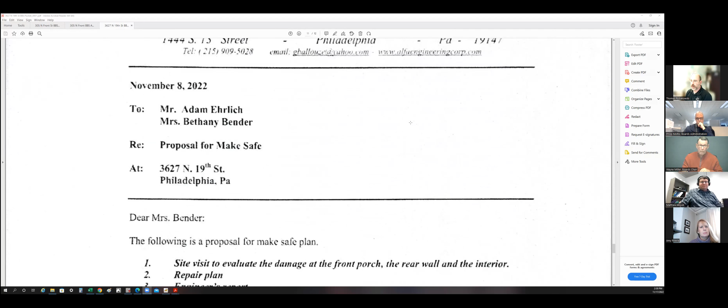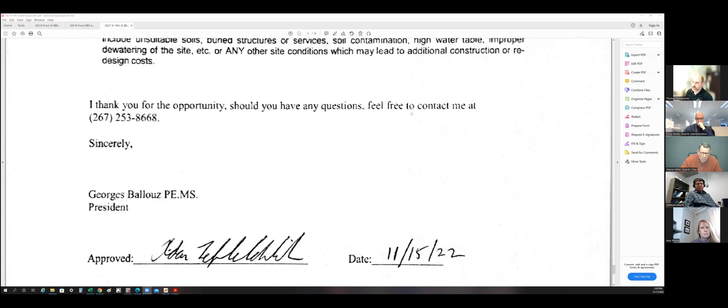Thanks, Tom. There you go. Okay, so this is the document we received via email yesterday. The document is a quote or invoice for engineering services dated November 8th of 2022. It has one of the appellant's names on it as well, and at the bottom of page 2 has a signature dated November 15th. With that said, obviously the violations exist, and there's an engineer's report from a design professional who's been retained. My recommendation to the board is to have a make-safe permit in with the department within 30 days.

Okay, stop sharing the screen. All right, the appellant, are you good with that?

So I do have at least one question. I haven't spoken with the plans examiner for this case, and just wanted to know, before we actually get the plans back from the engineer, what is specifically expected by the plans examiner to see on the plans. I have gotten make-safe permits in the past, and it's sometimes been a bit of a toss-up on what the plans examiner wants to see versus what we can see on the violation versus what the engineer sees. So if we could get a little more clarity on that, it would be appreciated.

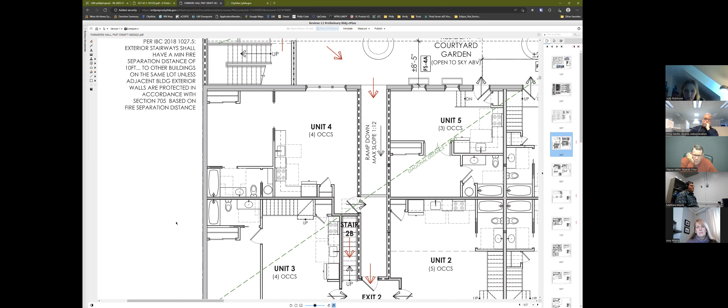Yeah, thank you. Can we see the whole plan? Or just that plan, because we're talking about stairwells and I can't read it. Right, just that. But also once again, stair one doesn't look like this now, it's different. Then we need to look at the right one. Do you want me to bring up my plans and figure it out? Yeah, if it makes it easier. I think this is the one that's the most recent.

Yes, that's the one that's the most recent. Matt, a question. When you said that stair one is okay, you may be referring to a specific issue, but is stair one, or that passageway around it, still being re-entered from the exterior, from the garden courtyard?

So that is still essentially a problem, that anyone coming off of stair 2A who wants to get to Girard Ave would have to go back under the building through stair 1, through exit 1 which contains stair 1, and then to the exterior. Right, so it's really the same or a similar issue with both that and the way that goes out to 6th Street. Yes, because if all those units needed to get to Girard Ave, if for some reason they couldn't get to stair 2A, they would have to re-enter the building as well.

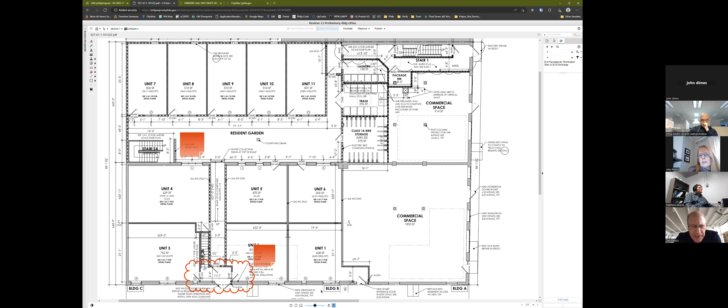Yeah, I can see why. Doesn't the laundry room then technically end up with its door in an exit passageway as well? Well, they call it out as a 90-minute door, so that's sort of accounted for. But if you call it that, then yeah, especially since there's a room right here.

Yeah, and I was doing that in part. It also has the walls around it, not totally 2 hours all the way around, but there's a little bit here that's 1 hour, and it has 90-minute doors.

The reason the door is positioned where it is presently is because I'm trying to get above our stair configuration, which is different. It might help to go to that second floor plan so you can see that, so I'm trying to make it completely 2-hour enclosed.

Let's go back to this plan again. Go to the 2-hour... where is it? Where is it?

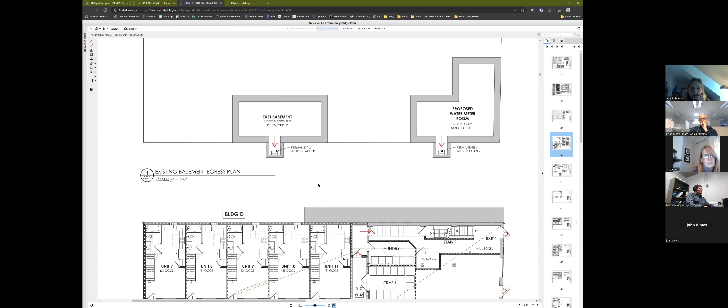There, see, I want to make sure that whole stair is enclosed with 2 hours, so I moved the door on the first floor in order to make that complete 2-hour enclosure, if that makes sense. I could always push it back, but then I don't have a place to complete my 2-hour enclosure.

And again, I'm treating that more like it's a lobby. And if the package room, if that's giving us a huge problem, we'll just get rid of the darn package room.

The moment to make it completely 2 hours, that's fine too. It's mostly 2 hours at the moment.

I would just, to back up big picture, maybe go back to the first floor again, Matt, if you could. You've got stair 2A, which is coming down. I think we're okay with that as a stair, as long as it's non-combustible, its proximity to the property line, and to the kind of different—I'm assuming all of this is like one property consolidated. Yeah, it is, correct, one building.

But when you come down from there or from other places in the building, there needs to be a really clear, as much as possible, direct way to get out of there from the resident garden, whether it's people on the ground floor who are just coming out and getting out to 6th or Girard, or conversely, coming down from upper floors, primarily on stair 2A.

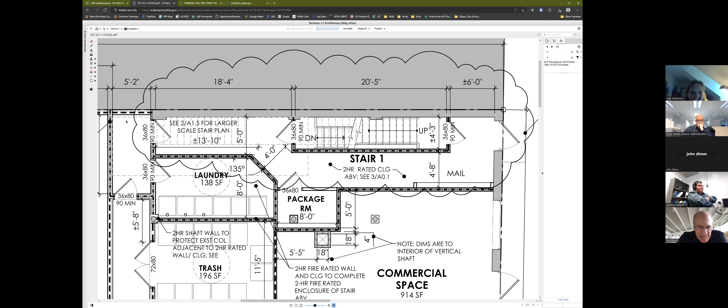Anybody have any ideas? I mean, I can tell you what would make stair 1 code compliant just in of itself. It would be like, ironically, unenclosing stair 1, keeping the lobby rated as is, removing the package room, and then it would just be an interior exit stairway that also lets you exit from the first floor directly to the exterior. What do you think of that?

Because it would just be then one again big enclosure. Okay. Yeah. So, can you mark up on this? Well, at the present time, I don't think I have a review open. So let me just.

So this is kind of the problem right here, because if we're going to call this an exit passageway, then this would have to go. Take it out. To make that go, or move it somewhere else somehow. It was an amenity that we thought, in today's world, would be useful, but we get it. It's not certainly critical to have. Yeah, we'll get rid of it. Because once you remove that, then this could be an exit passageway.

And let me just check exactly what the code says about whether or not you can have interior exit stairways terminating into an exit passageway.

How about the mailboxes though too, Matt? Now, we do need a place for the mailboxes. Oh yeah, the mailboxes have got to go too. The reason I didn't put them on the refusal is because I considered this like a lobby and not like an exit passageway or an exit. It was just like another area which you egress through. I think is what the exit discharge section calls it.

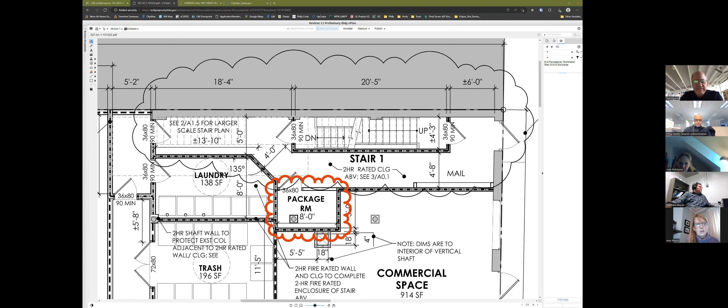No, I'm more concerned about people coming out of the courtyard, trying to get out and passing a laundry room in an exit passageway, passing through another door, passing a package room. Which, in that case, leads to this being treated as an exit passageway, meaning it couldn't have this package room or the mail.

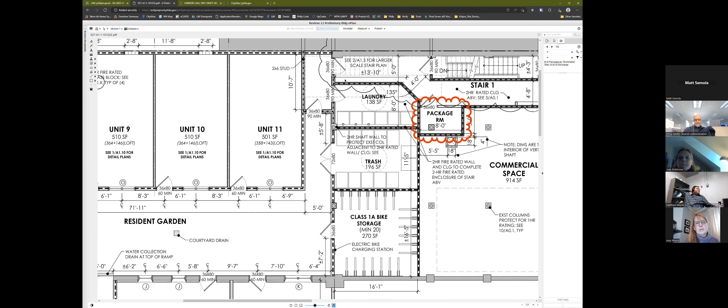What about the laundry? I mean, well, that's outside of that space. Yeah, but it's still part of the way you're getting out of that courtyard in an enclosed area. Yeah, that's the thing.

On that note, if I moved the door, if I flipped the laundry room around and got that door that's going into the laundry room -- the washers and dryers are shown now -- and then pushed the enclosure where we have the first 90-minute door, if I push that up to where the dash line is, I want to keep my 2-hour enclosure of that stair that's happening above us.

If I got that laundry room door out of that area, would that make you happy? Because I think I can do that. I won't get as many washers and dryers, but I think that's the sacrifice we make.

I guess I didn't understand where you're putting the door, but if I'm trying to get out of that courtyard and I'm running down that corridor, am I still passing the laundry? You're passing the door, yes, but that would be like if you were in a corridor in a building -- you're passing doors to other rooms along the side, just not directly in front of you.

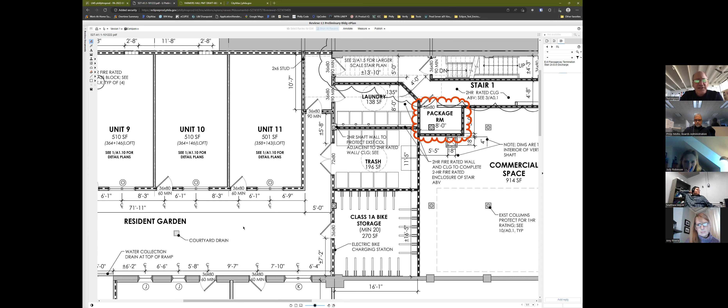But isn't the space between unit 11 and say the trash room -- aren't you going between whatever, a 6-story building and a 4-story building? I mean, I know they're not the number of stories, but right, they're basically... you're in a canyon.

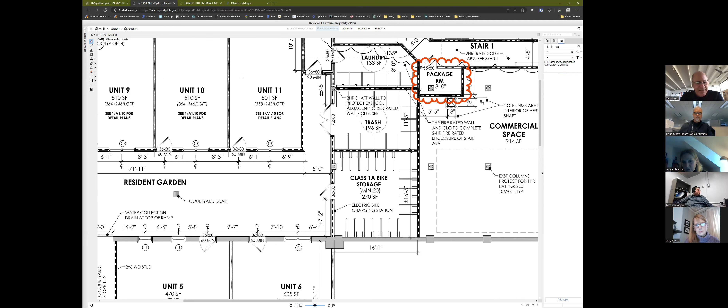You're in a canyon. You're covered above, though. For a little bit. Are you covered above? You're covered above, so it's a canyon that you're covered above because there are walkways above to get you to that stair as well.

Okay, I have to look at the other plans again. I'm going to have to go back to the second floor plans. Okay, here you go. This is what she's referring to.

Right, so that bit where all the dashed lines are heading to stair 1, that's all exterior space, right? That's over here by 14 through 18, this is all exterior. And then you turn up and you're heading to stair 1, that's all exterior as well, right? But again, you've got the floor above you covering you. But yes, essentially, yes.

This is buildings B and C.

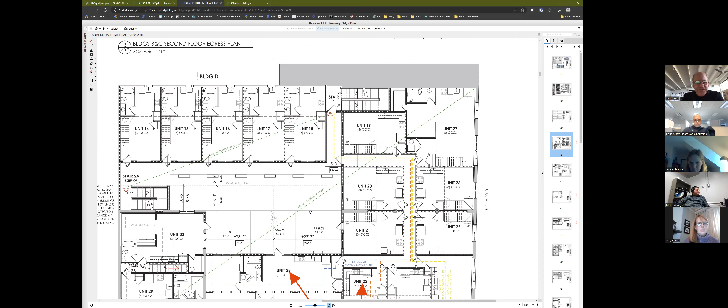Are we looking for... are you going to the 3rd floor or what? Oh, or what are we? No one was saying anything, so I didn't know if you were just thinking. Yeah, no, I mean, it's...

Okay, this is 3rd floor. It's weird because there are height differentials. Oh, okay, all right, I see, because right, like this floor says 2nd floor for buildings A and D, but it's 3rd floor for B and C. So it's getting backwards in terms of reading, it's confusing.

But so the point is that the space is wider there. Everything's coming out. Yeah, so you're right, okay, it is capped on the ground floor. There's a little bit here, but I think there's still a bit that's trying to outline it. This part is still exterior. Right, it's all exterior the whole way up the back and down the side of it. Yeah, okay.

Simply put, this is a preliminary review, and presumably you're doing it in order to get feedback. I guess we're not convinced that there isn't a way you can solve all these problems and still get your package room and address all those functional, programmatic needs that you have. It's just that in trying to accommodate everything, it's become more convoluted than we're hoping it could be.

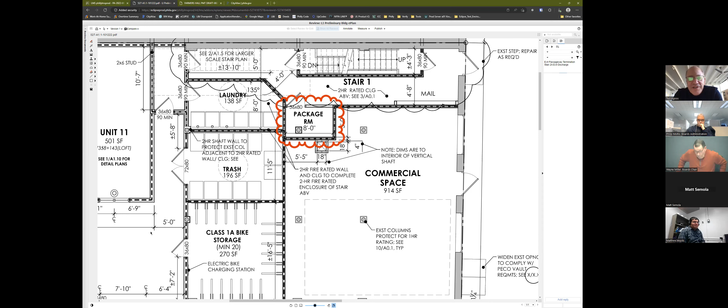So we have some specific feedback on the package room and the mail, okay, we get that. As I understand the code, one of those ways out to the street could be through a lobby, which can have mail and package room off it. If the other one were direct—and again, I don't know how to resolve that—but if stair 2B didn't dump you into the same space so it was a straight shot out, I don't know whether that would help.

Judy, I have a question for you. Yes, and we'll try to wrap this up quickly.

So that's stair 2A. There's a big red box there, I can't read what it is. This is a 2-hour rating wall, specifically right here. Is that a window there? That double window—a door, a window? Unit 4 coming out of unit 4. Yeah, that's a window for that unit.

What I was going to say—if we could extend that exit, you come down 2A and go right to that and close all that. But then you're chopping into the open space, and you eliminate that. From what I'm understanding, 2A isn't so much an issue as stair 1, because all those back units feed right—they go down the hallway and walkway right to that exit, 2A, that is.

Now I want to see stair 1 lobby exit, the Girard Avenue exit. So that'd be units 14 through 16, 18, correct, these right here. They all feed right into that, as well as stair 2A—they could take either one from there.

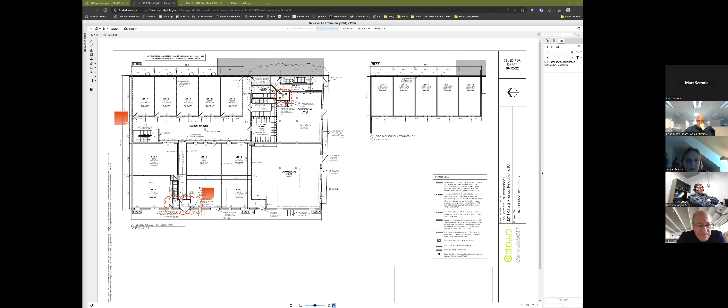What else have we got? The other is the common path of egress travel. If you go back to that map, right here—yeah, my new drawings have the actual length. From those 3 units, our common path of egress travel ranges from 128 feet to 145. So we're beyond the 125 feet to that exit door where we have 2 choices. But we are just on the 2nd floor.

Yeah, wait. John, how do you feel about this? I think that's slightly longer, but still. I mean, they'd be allowed to have it 125 feet if this was all residential with an NFPA 13R system.

Hold on. So is there, what's the allowance? So it's not all residential. So the code dictates the distance. It's because of the commercial on the ground floor, but yeah.

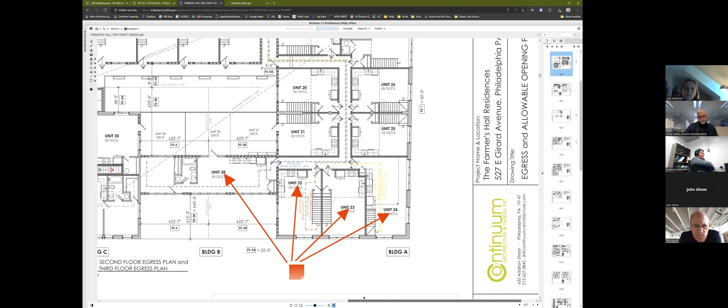Okay, because I think it says, because they go here and then - it's just confusing because of all the different heights in the existing building. Yep, and so they end here. This is okay, so there are just bi-level units. It ends at 3rd floor. Okay, I was mixing them up with the other ones.

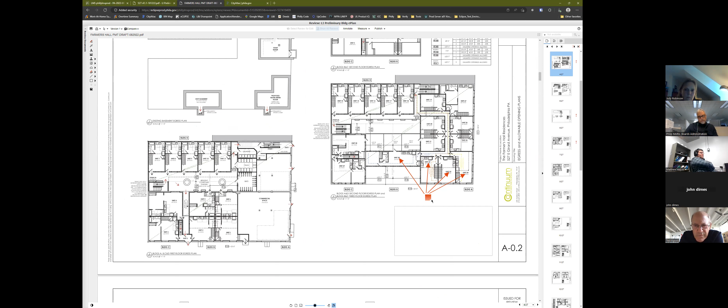Okay, so is the distance from the most remote point of all 4 of these to this point right here? Because this is the point at which they will actually have 2 distinct means of egress available to them. Right, because until that point, they all have to take the exact same route until they get to here.

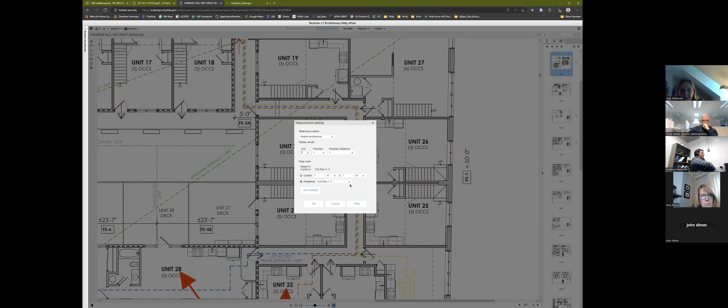And so I think I did remeasure all of these, and it did come up just a little - all of them still came out over 125 feet at this point. By how much? Let me go back. It's just on the latest drawings, everyone. Sorry to interrupt. It's not by much, from 128 to 145. The longest travel distance is from unit 28, which is 145 feet. The other ones are 128, 130 something, I think.

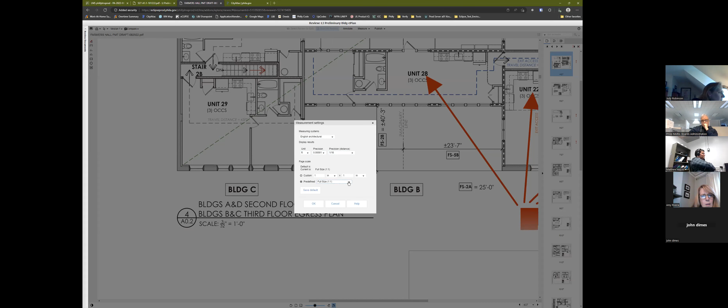Let me pull my setup here, I can tell you exactly. We don't usually play with those requirements based on fire department's advice.

Yeah, travel distance is a big thing because it's all about time of getting out of the building, right? So more feet, more time to get out. And again, I understand what you're trying to do here, but when variances are usually given, in my point of view, it has to do with a couple different things. The code's interpreted differently.

They don't fully apply, or there's an equal to or better way of doing something. And I don't see it for me to say, yeah, it's okay to not abide by the fire code or what's in the fire code. I'm not a building code guy, I'm a fire code guy. Because it's difficult, or we have a building that's hard to manage and to make it happen, that's not a reason for me to say, oh okay, then you don't have to do it. It's only 15, 20 feet. Or, yeah, well, that hallway, it's tough for you to do that. But because it's tough, then just don't do it.

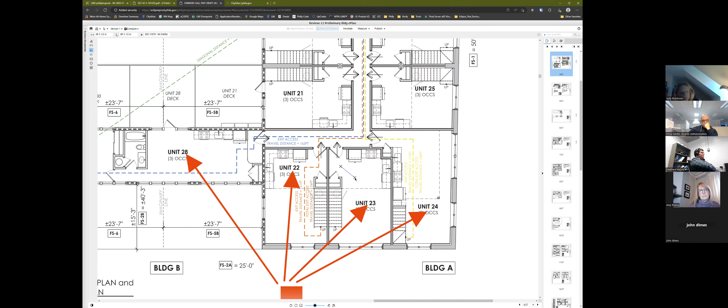That's never been my opinion. So unless there's something you can say, hey, I can't do X, but I can do Y, and Y is as good as X, or the code was misinterpreted, then I usually come down on, you got to make it work, and that's not up to me to make it happen. That would be up to the design professionals. That's my opinion. And I totally get that, John.

And that's why we're saying if we have emergency escape and rescue, since we're only 20 feet off the street, isn't that an equal trade-off? Because one of the things we're trying to do here is we have this blighted building that's a historic building in the city of Philadelphia, and we're trying to bring it back to life. And I think that there's value in that. Absolutely, incredible value in that. And I don't know that you're not running into these issues no matter what.

Can we 2-hour that section of that hallway? It's an hour, it's 1 hour. Which code? Well, the corridor may not have to be rated at all. Presently, we're a full hour. Okay, so can we increase that? Will that satisfy the fire code?

Sorry, you guys blanked out there for a second. I didn't hear that last thing you said.

John, if we did a section of that hallway at 2 hour rating, would that be a reasonable compromise? You're talking about the hallway that gets us to another 2 hour rated section? Is that the one crossing through the packaging room and going past the laundry? No, we're upstairs, John, we're on the second floor. Okay, sorry.

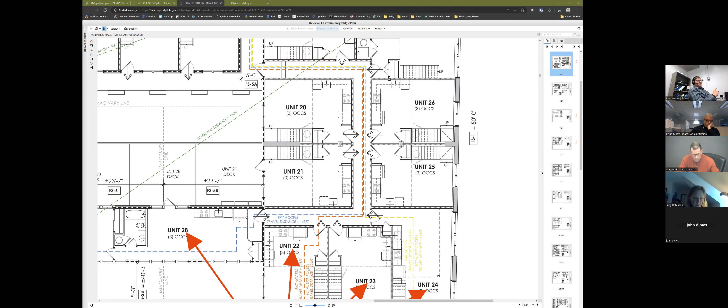I think that typically only applies if you have one means of egress and you're on the second or third story, or if you're in a 4-story building. Let me see exactly what it says. I also know the building code is very explicit that emergency escape and rescue openings are not a means of egress, it's in addition to the means of egress. Right, and that would be our case. All right.

Let's see what this says. Keep in mind, we're much closer to our exit than is allowed by the travel distance. You're allowed 250 feet, and even though our common path of travel is further than the 125, our actual travel to the exit itself is like 163 feet to an exit, around that number for all of them, for the total distance to the interior exit stairway.

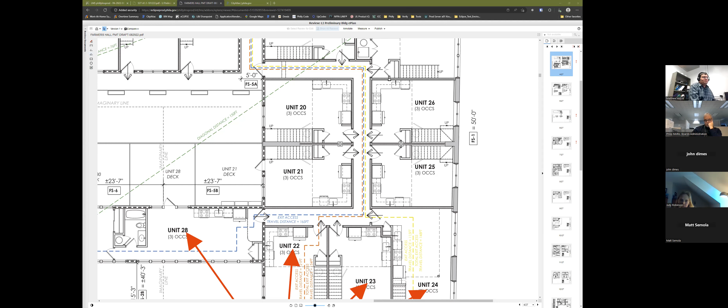But what we're talking about here is common path of egress travel, which is the distance until you can choose between exits, or choose between two paths to two different means of egress. Well, what do the architects think on that? Is an extra hour rating of a hallway equivalent to the travel distance?

Honestly, I think that... no comment, I'm talking to the board. Oh sorry. You're not an architect. Oh, engineer. Yes, I'm sorry.

Really, John, that's the kind of thing we defer to you on. Intuitively it seems like it could be a little more protection, it's buying you a lot of time to have the additional hour rating. I mean, technically it's 15 feet - can an extra hour give you 15, 20 more feet? Right, that was my inclination.

But in the past, I don't remember all the cases - is there a precedent, was that a solution to this type of problem at times, just increasing from 1 to 2 hours to increase the travel distance? I don't remember something specifically like this, but I think yes, we've used 2 hours instead of 1 hour for a variety of things, on a number of occasions, like when you have to run back under a building to exit.

I mean, the good thing here is when you get to stair 1, or even to stair 2A, but to stair 1 you've got a pretty direct shot out to Girard Avenue. Yeah, that's beneficial.

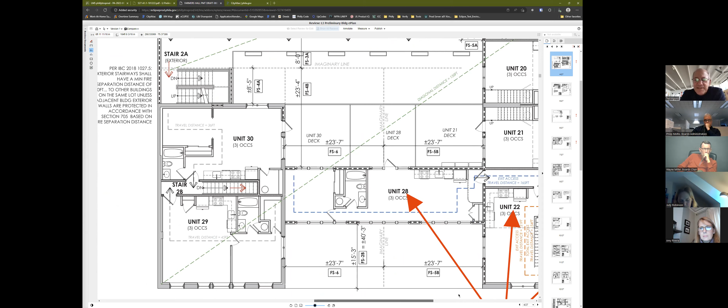But I think if you're saying that the maximum common path of travel is 145 feet and we can basically accept that - yeah, and you have them, she would have sent those drawings, that is a maximum, I think she said she was sending them to you. Yeah, but the drawing that I have that was sent to me that says egress plan doesn't show all those travel distances.

I'm just looking at what Matt has here. Whatever Judy sent me, Phil forwarded that to you. All right, wait, now I see some of them on it. Okay, see what I mean?

In the meantime, just reading the code again - I just checked exactly what section 1030 says about where emergency escape and rescue openings are required. It says Group R2, where it says Group R2 in stories with only one exit or access to only one exit, as per tables, gives the single exit maximum distance tables.

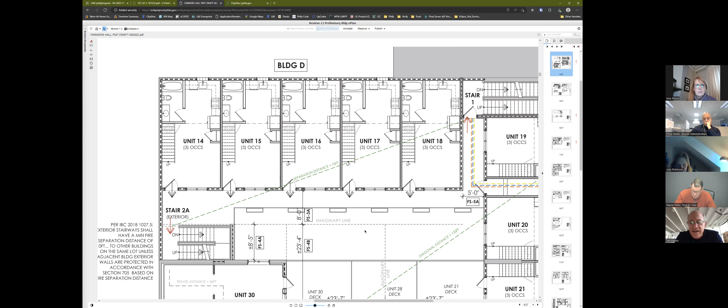Yes. Are we satisfied with that, with the travel distance? I think we need to caucus before we... Okay. Is there anything else before we caucus?

Was there still an issue with the exterior stair and its location relative to the building? It's not meeting the requirement that it can't be less than 10 feet from other portions of the building or adjacent lot lines. It's right up against the lot line, about 8 feet away from units 14 through 18. That portion we're typically good with as long as it's non-combustible. Yeah, and we're non-combustible. Okay, cool.

Okay. Right. Okay. All right, let's caucus. All right, so we should go?

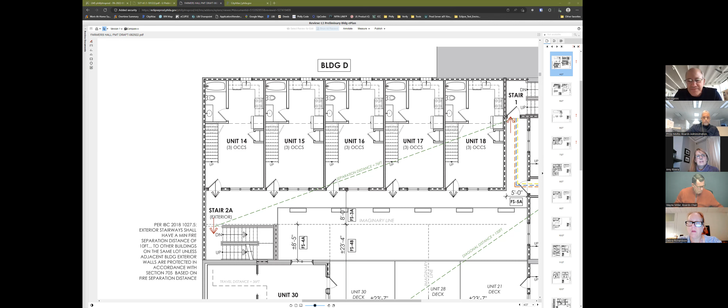No, no, no, you can't. Then we'll put you in the waiting room. Okay, thanks. Do I have to do anything? No, don't go too far. I'm gonna put you on standby. Hold on, don't move. Who's sharing? You need to keep the things up. That's fine, keep that up. Where are you, Judy? Oh, here you are, at the top. I got you. Okay, so let me see. That was it, right? Just the 2 of them. Yes, you want to stop recording? Yes. Yep. Well, where's your other person?